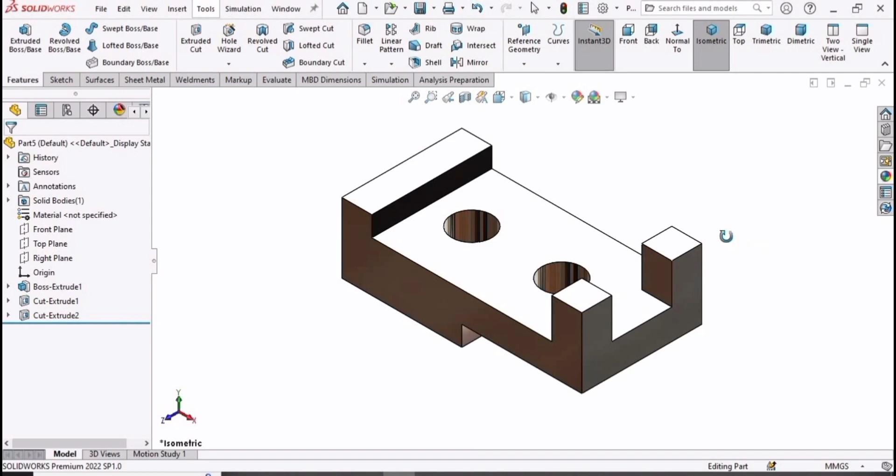Welcome to this SolidWorks tutorial in which we will be making this part. So let's begin. At first, select File, click on New, select Part here, and then click OK. This part window will open.

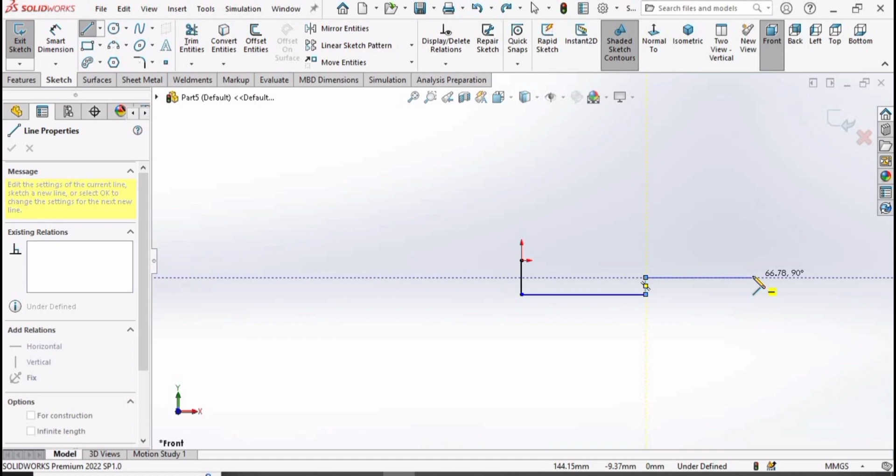Now select here Front Plane, click on Sketch, select here Line, and at this center point, make a sketch like this. Make sure that you have selected mmgs for units. And now after completing this sketch, press the escape button and select the smart dimensioning tool.

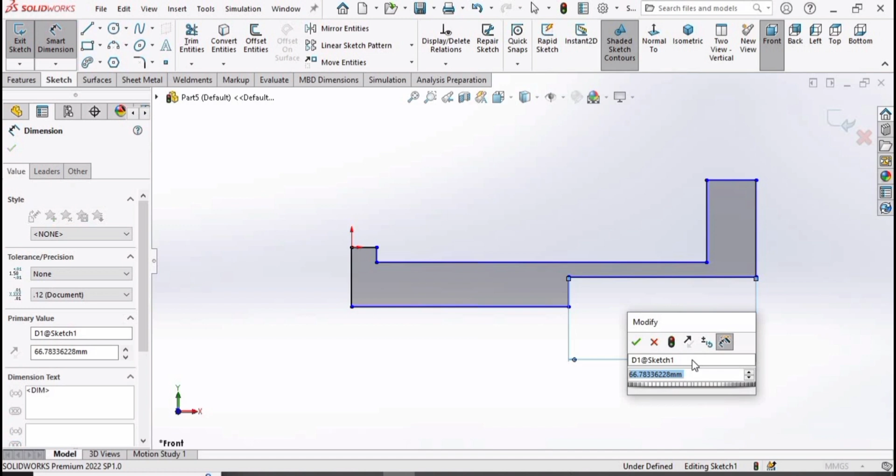Specify the length of this line as 60 millimeter. Now specify the length of this line as 15, and now specify the length of this vertical line as 20, and then this vertical line as 35.

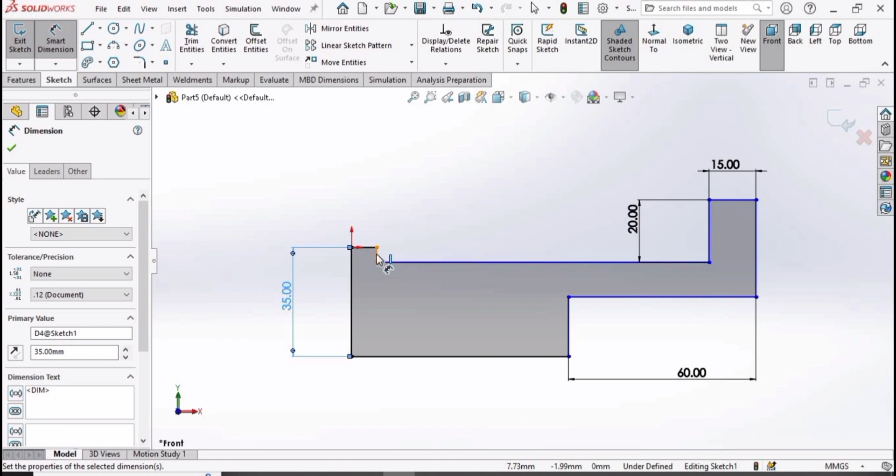Select this vertical line and specify the length of this line as 10, and this horizontal line 15, and now we are only left with one vertical line and one horizontal line. So specify 60 here and this vertical line as 10 here. Now the sketch is fully defined and it is ready for the extrusion.

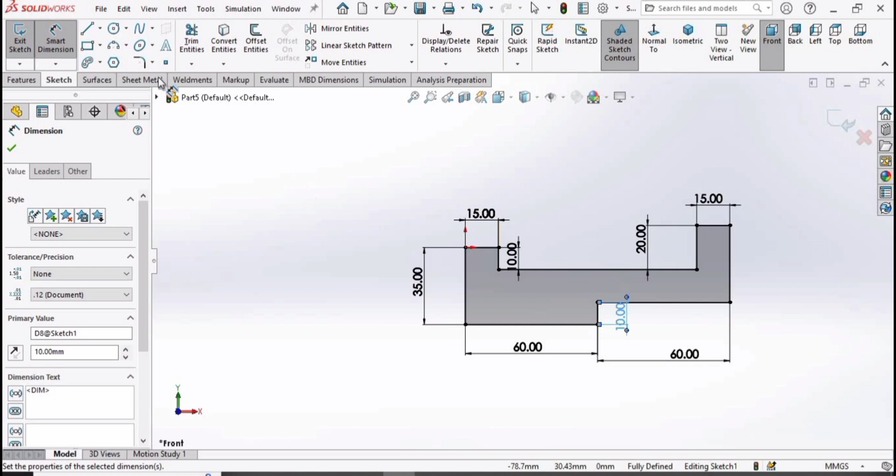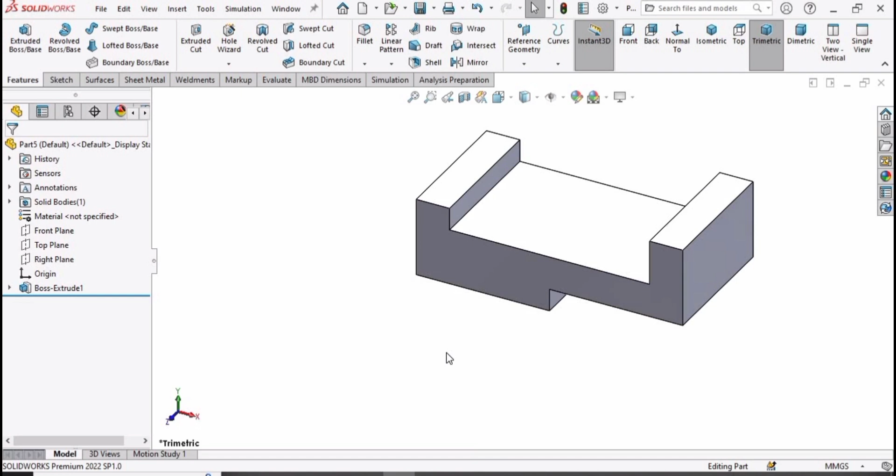Now go to Features, select Extruded Boss Base and increase the length of extrusion to 60 millimeter. Check this box here, and now change the background to plain white. Here specify some appearance. You can specify any appearance.

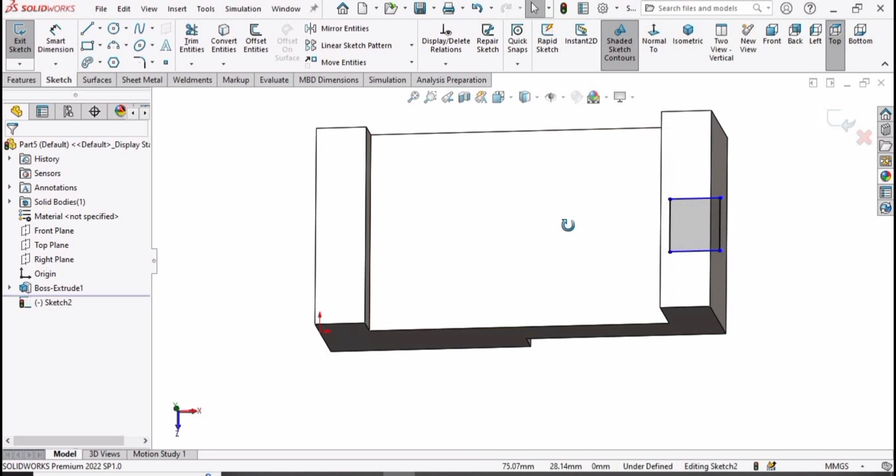Okay, so now select this face, click on Sketch, and here select this corner rectangle and make here a corner rectangle. Now press the escape button, and now let's define it. Select Smart Dimensioning tool. From this corner to this point of the rectangle, specify the distance as 15. Similarly, from this point to this point of the rectangle, specify the same distance.

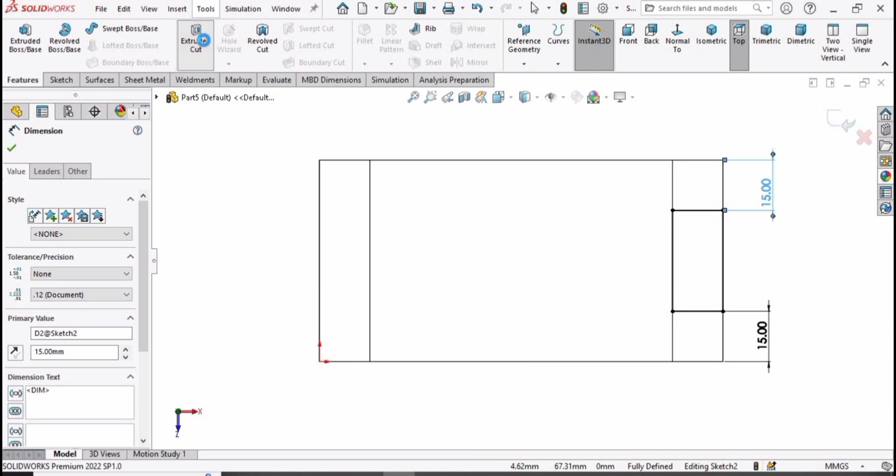Now go to Features and select here Extruded Cut, and here we have to flip the direction. For that, click here and simply check this box, and this profile has been created.

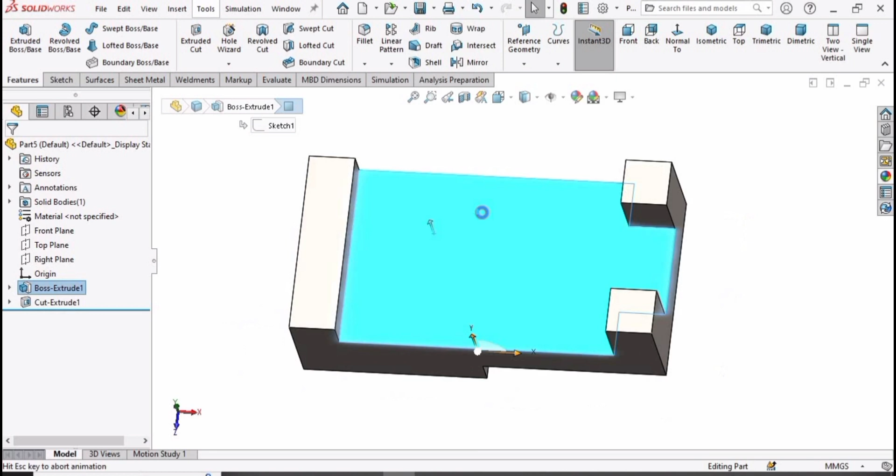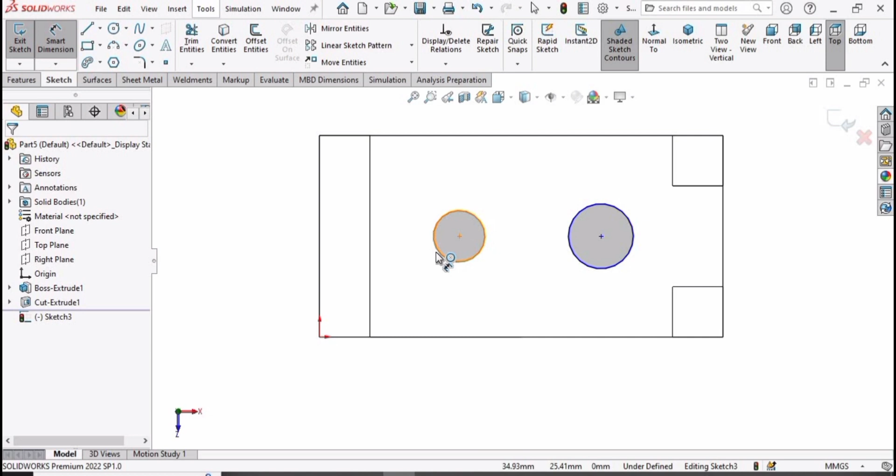And now select this face and click on Sketch, select a circle and trace this yellow colored center point, and then make here a circle. Press the escape button. Now make another circle, trace the center point of the previous circle, select the Smart Dimensioning tool, and here specify the diameter of the circle as 30.

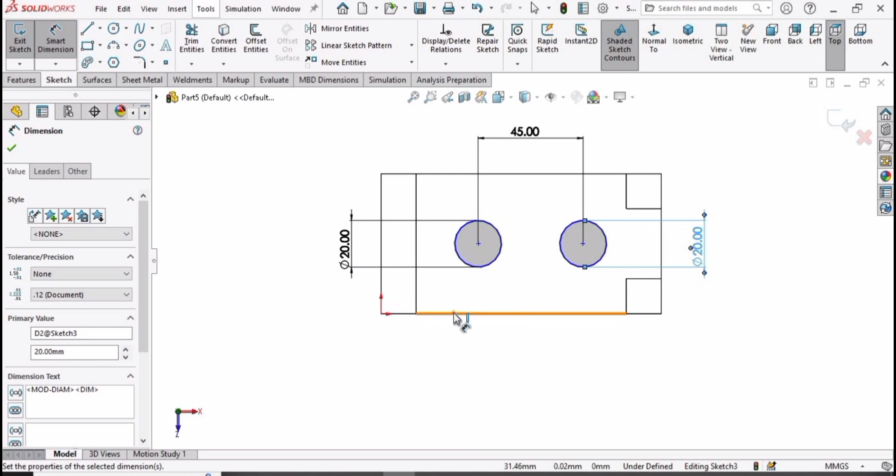Similarly, specify the diameter of this circle as 30, and specify the distance between these two circles as 45. Change this diameter to 20. Similarly, change this circle's diameter to 20 as well. Okay, so from this point to that center point of the circle, this should be 30. This is fine, and this vertical line to this center point, set the distance as 20.

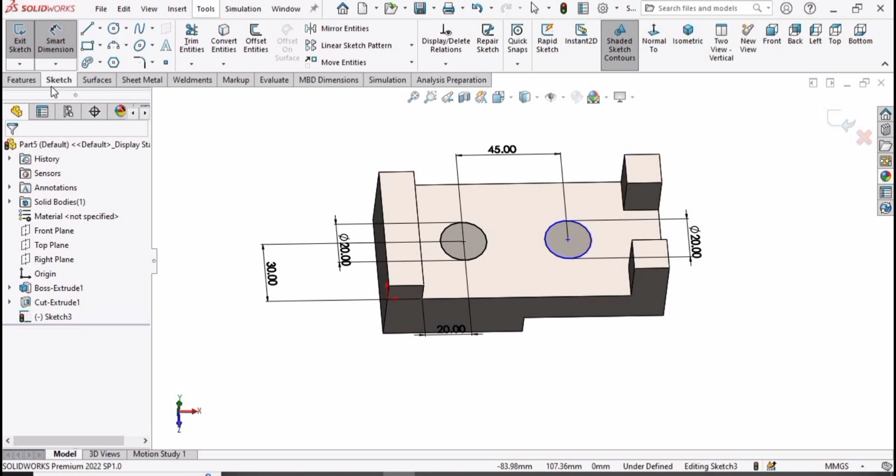Now go to features and select extrude cut, and here specify through all rather than blind, and then check this box. And now you can specify any other appearance if you like.